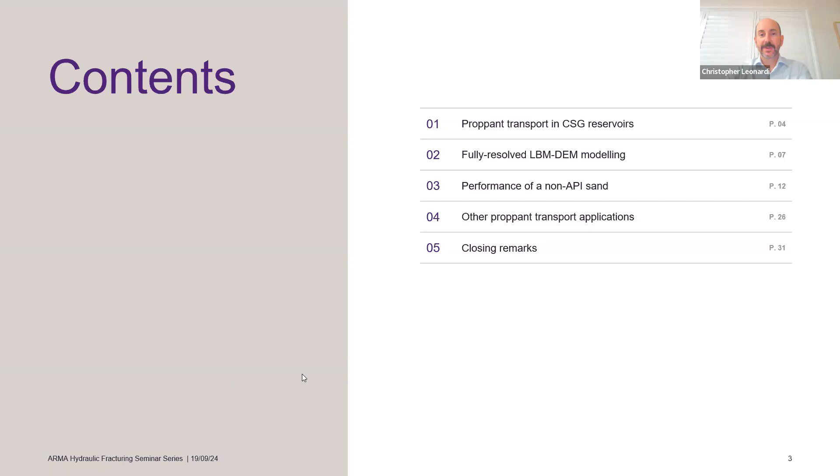Coal bed methane is a little different to shale. We're dealing with reservoirs which are naturally fractured and in the large proportion don't need any hydraulic fracturing for economic production. So the natural fracture network results in sufficient permeability to produce economic rates of production. But where the natural fracture network is not sufficient, wells will be fractured to try and get economic rates of gas out of the subsurface.

So we all know what hydraulic fracturing is. I don't have to go through the details on the left. I will say that various techniques have been used to try and improve hydraulic fracturing outcomes in coal seam gas reservoirs here in Queensland, including the use of 100 mesh following pad and prior to a more traditional sand to try and enter some of the cleat network, which is connected to the primary fractures, and also much more recently, the deployment of microproppants to try and also activate that cleat network, which is shown schematically over here on the right.

So we've got a diagram of some typical face and butt cleats that you would have in a coal seam, and down in the bottom right-hand side, this sort of schematic idea that one would inject particles into the primary fracture that hopefully leak off into the cleat network to help stimulate them after the fluid pressure is reduced.

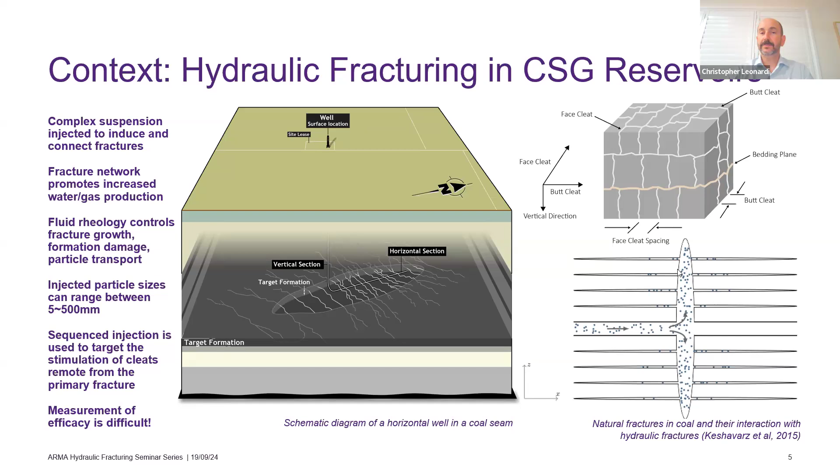And so what do we do to try and understand proppant behavior? As has been mentioned, we do high-fidelity simulations of particle transport in very small geometries. So that's where the thimbleful of proppant comes from.

And we do this in such a way that we try to capture all of the relevant physics in the particular problem. So Navier-Stokes hydrodynamics, full frictional contact of particles, and the boundaries or the fracture in which they flow, fluid rheology, any electrostatic forces that might be present as well, and do simulations that look like this animation here.

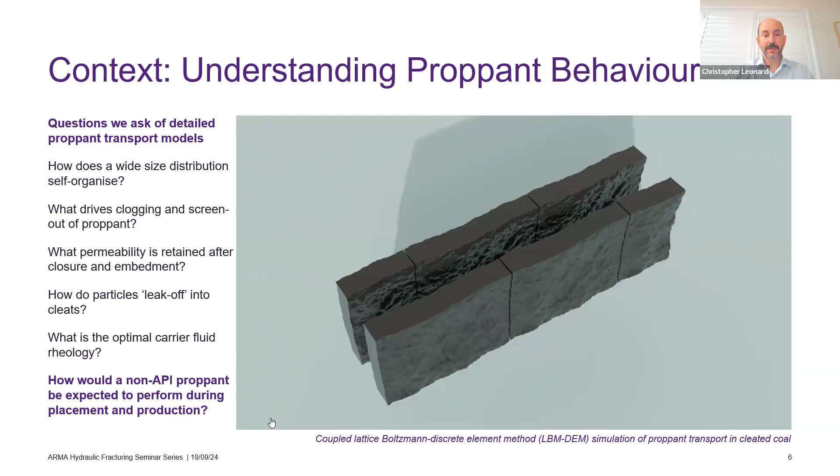Hopefully it'll, whoops, it's not played for some reason.

I'll try that again. So yeah, this is just a rendering of one of our simulations. We've got a primary fracture with some branching cleats, and then we start injecting our proppant suspension. We see leak off, and we see occlusions forming at those leak off points because of the drag of that fluid in part on the particles near those cleats.

And we can use this type of model to study a whole bunch of things, including size segregation, migration, particle leak off, and ultimately the retained pack and pack permeability in our fracture. So particular questions that we've asked of this type of modeling include, if you have a wide size distribution of particles, how do those particles self-organize? How do they migrate? How do they segregate?

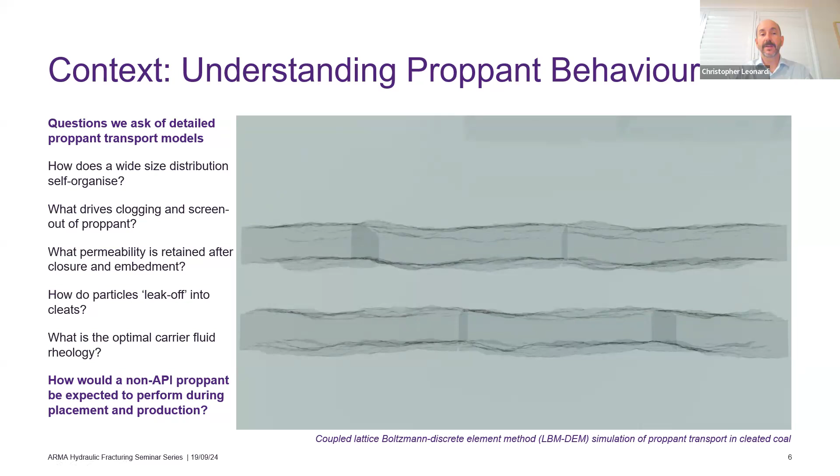What drives clogging and screen out of proppant under various solids loadings and fracture textures? What's the retained permeability after closure or conductivity and embedment? How do particles leak off into cleats? What's the optimal carrier fluid rheology? And the focus of this talk will be how would a non-API proppant be expected to perform during placement and then production?

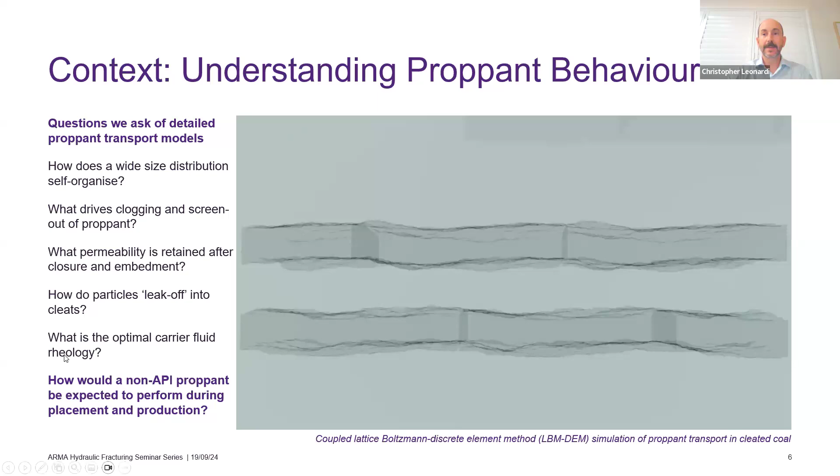So I'll talk very quickly about the modeling technique that we use here, where we're using the lattice Boltzmann method to simulate the fluid mechanics and the discrete element method to simulate the particle mechanics. For those of you that don't know, LBM's a fairly mature alternative to conventional methods for modeling fluids now, where the traditional methods discretize the Navier-Stokes equations.

What we do in the lattice Boltzmann method is we discretize an averaged form of the Boltzmann equation for statistical mechanics. And instead of solving PDEs like Navier-Stokes momentum and mass conservation equations, we solve for the propagation of particles of mass that move around on a grid and collide with one another. And at the macroscopic scale, that mesoscopic model actually emerges to give us a Navier-Stokes type hydrodynamic model, which is very useful because we can implement it on a regular orthogonal grid.

It's very straightforward to map complex boundaries on the lattice Boltzmann method grid. And therefore, we can incorporate a large number of irregularly shaped particles. We can couple those in. And we have some serious advantages in terms of locality of computation, which means parallelization is relatively straightforward. And we can really make good use of not just single GPUs, but multi-GPU clusters, which are beginning to dominate the high-performance landscape in the big compute machines worldwide.

So LBM is actually used quite widely in industry now, a lot for vehicle aerodynamics. The major CFD packages have got their own lattice Boltzmann solver implemented in them now. And so it's no longer a niche technique, it's actually quite widespread.

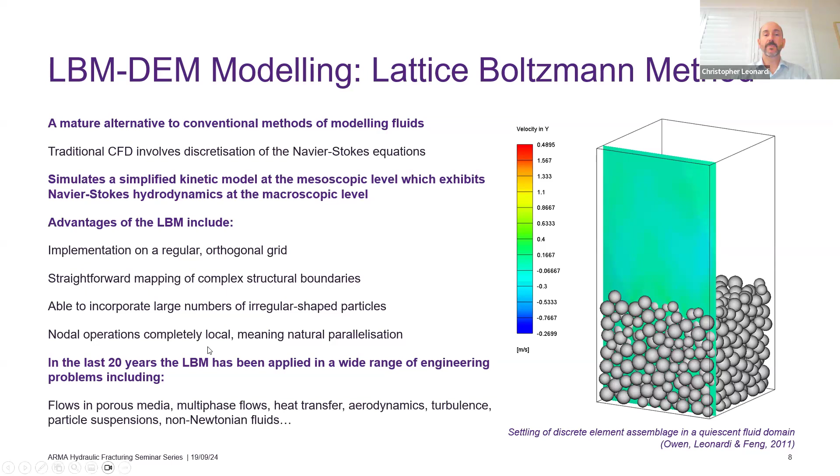And so it's used widely in bulk materials handling problems, but also in geomechanics, where we're dealing with the fracture and fragmentation of rock type materials. So one of the good advantages of DEM is it's very straightforward to couple it to the LBM, as I've already mentioned, and simulate particle suspensions at high fidelity. So what I mean by that is we're fully resolving the pressure field around a particle so that we capture the drag and lift quite well.

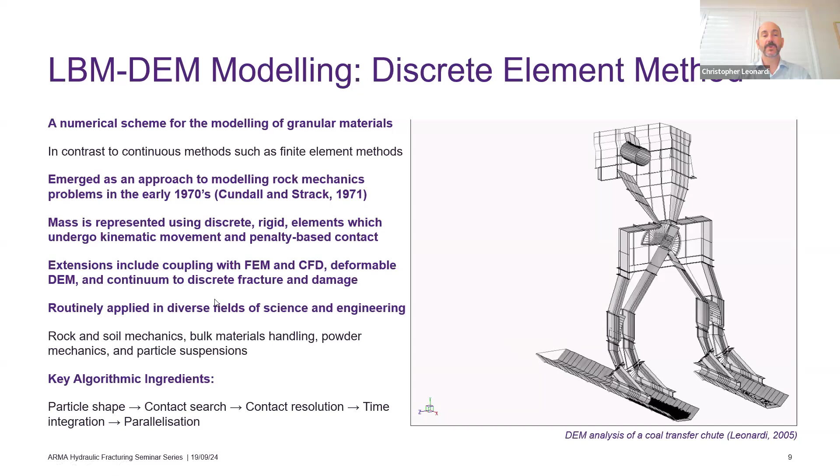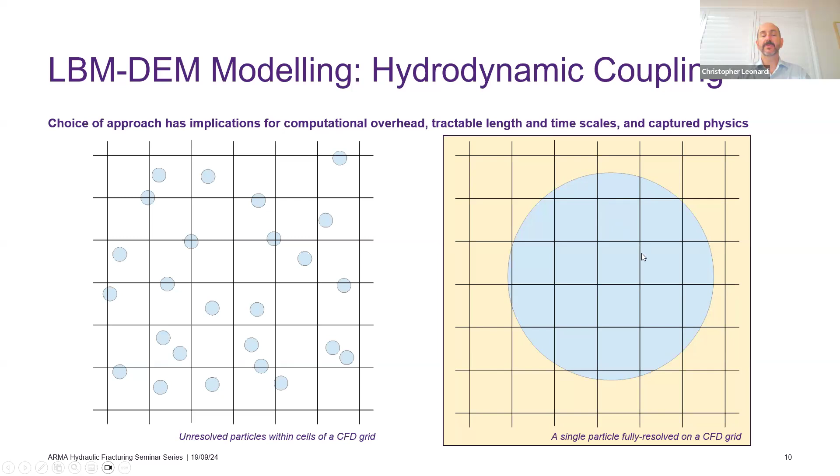Here, it is the opposite. And so what that implies is that these computations, even though they are physically quite small, are quite expensive. And so we're using significant amounts of compute time to be able to generate the results that we are generating.

If you're interested in how this works in a little bit more detail, the code that we publish is open source, so TCLB, and if you just search tclb.io, you'll find our website, where there's a whole bunch of papers that describe the mathematics and also allow you to download the software and play with it for yourself.

Right. So with that said, I'll get on to the case study that I wanted to talk about, and the problem was brought to us by an industry partner who were looking at using a locally sourced sand that was cheaper than the product that was coming from interstate, but less favorable in terms of its shape and its size distribution. And so I just refer to it here as a non-API sand because it does not meet some of the API standards, particularly on particle shape.

But there's a photo in the bottom left that shows you what it looks like. So it's quite angular. There's quite a wide size distribution. And you can see the size distribution also up here on the top left. And so just for comparison in terms of roundness and sphericity, you see that in comparison to a Wisconsin sand, which has got a really quite nice spherical shape, the roundness is significantly lower and the sphericity is lower as well.

So our partner was interested in how is this stuff going to flow in a fracture? Is it going to enter the branching cleats to help stimulate those? And once it is packed in the fracture, what's it going to mean in terms of fracture conductivity?

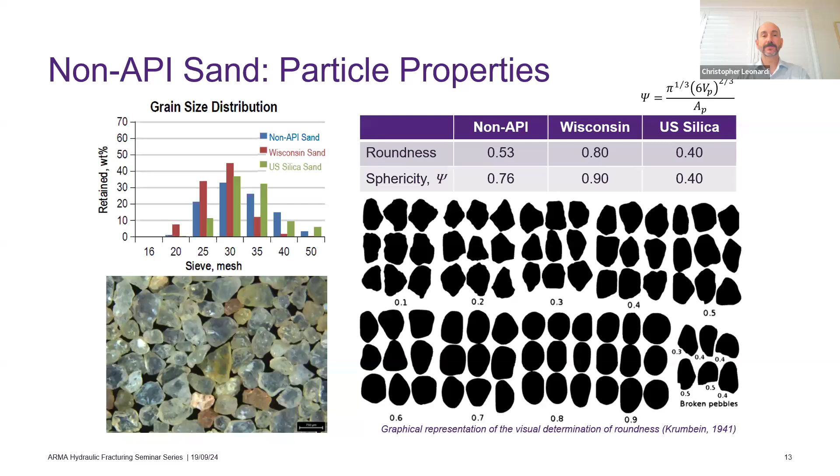So the way we go about analyzing this problem, as I've mentioned, is we study this at a very small scale, but we start with a fracture geometry that we generate from a power spectrum model, which was originally sourced from the literature. And we've modified it to take advantage of some imaging we've done on some rock surfaces here. And so with this power spectrum, we're able to generate lots and lots of different realizations of fractures based on 3 parameters. So it's the power spectrum, it's the surface correlation, and the distribution of roughness.

And so we basically can control the long wavelength tortuosity of the fracture, and then the short wavelength roughness of the fracture surfaces, and then how well they're correlated. And so if they're perfectly correlated, that means the 2 surfaces of the fracture are parallel at all times, but when they become decorrelated, they are no longer necessarily parallel.

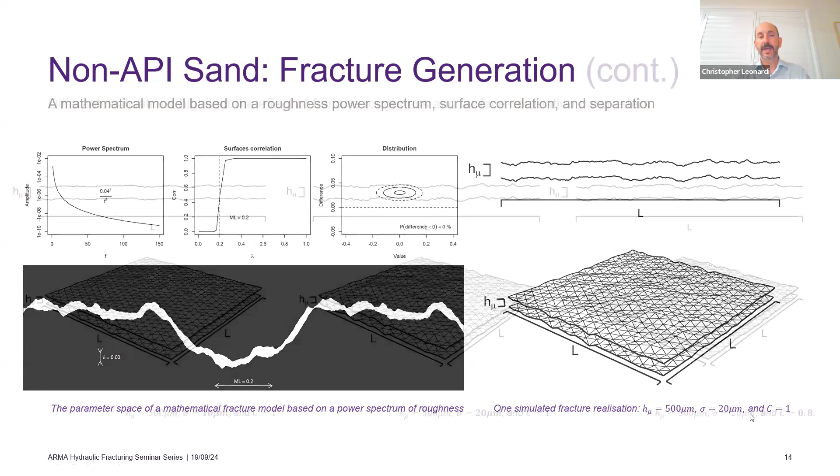And so what we can see here on the right-hand side is one realization of a fracture that has a mean width of 0.5 millimeter and a mean roughness of 20 micron. It's perfectly correlated, so our correlation coefficient here is 1, and a number of other realizations as well.

So this is a 0.5 millimeter fracture with a roughness of 10 micron. This is the same fracture with a roughness of 20 micron, and then a roughness of 20 micron with some decorrelation. And so as we continue to decorrelate these fractures, they actually will touch in certain places. And so we end up with something that could be a fracture that has been dislocated due to shear, or changed due to some mineralization that's built up inside the fracture.

What's really nice about this approach is that we can run, say, multiple repeats of the same analysis and generate statistics on our results. So rather than just generating a geometry, running it in our analysis, and then listing one particular result, what we can do is run 10 or 20 different realizations of the same statistical description of a fracture, and then get a distribution of what the results look like.

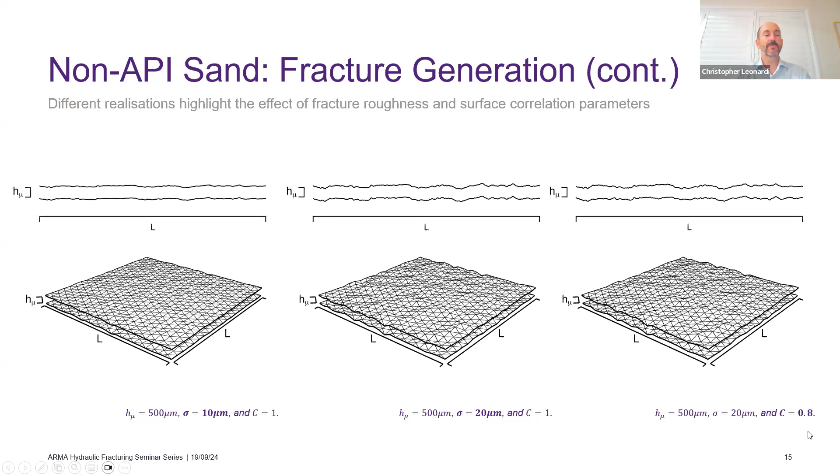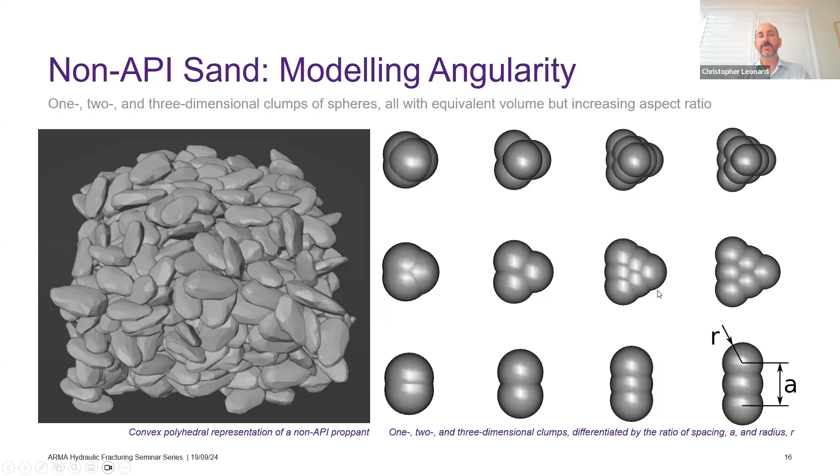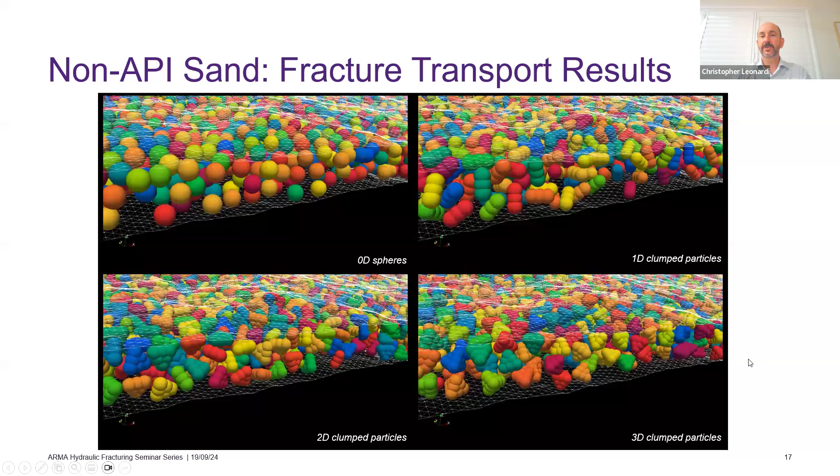So whilst this might be nice to look at, it doesn't really tell us much. It's certainly not quantitative in terms of what the behavior is that we're seeing there. And so what we do to interpret our results is look at them in the context of other empirical models that exist in the literature for suspension transport and also screen out.

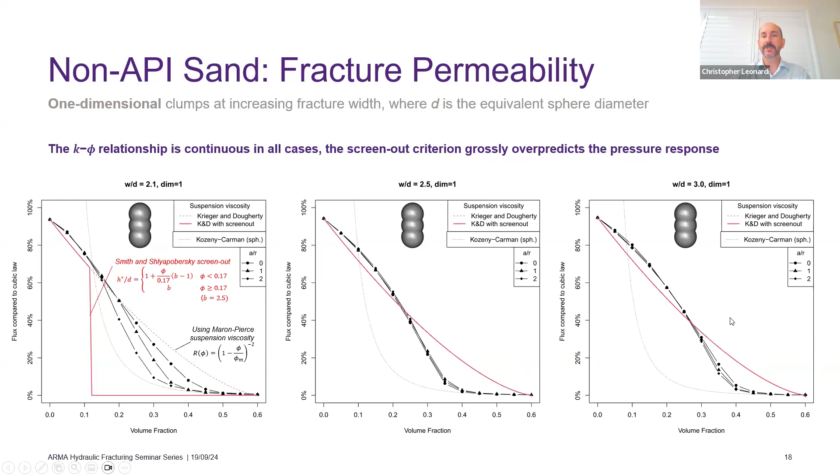The results are all effectively exactly the same, but in no case does the behavior match what you would predict with this Krieger-Dougherty model with the Maron-Pierce suspension viscosity. So then if we go to our 2D clumps, we see similar types of trends. We see the fact that as the fracture gets wider, the influence of particle angularity effectively disappears. That's true for this width on diameter of 2.5 and of 3.

but the way we see this manifesting is that there is a degree, particularly for these planar shapes, where they align themselves with the flow streamlines and actually flow better than spheres or particles that get longer again. So there is, for a certain shape, particles that align themselves quite nicely with the flow and therefore have higher fracture permeability. But as we get longer again, we expect that permeability would drop off again, and we'd start to see a drop in performance.

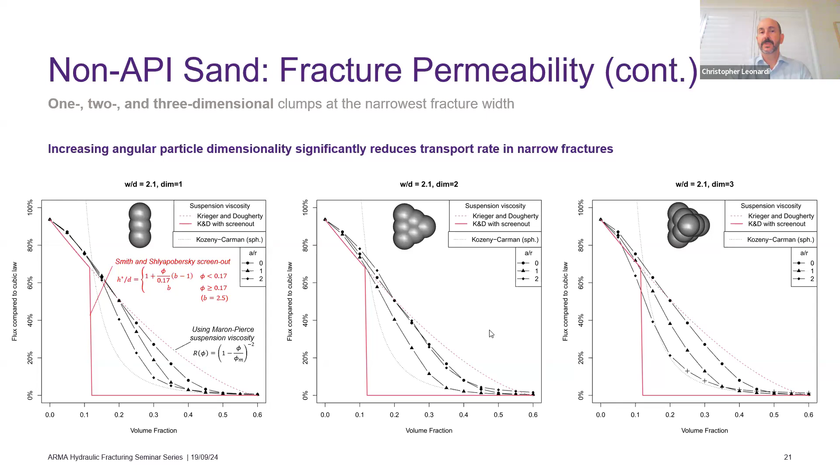And so in summary, really where the particle angularity is most important is in narrow fractures. So this is at fracture extremities, or as is the case for coal seam gas production or stimulation, in the cleats that we're hoping to have some of these particles enter. So where W on D is 2 or even less, we would expect really quite poor entrance characteristics of these particles, just due to the way that they transport in narrow fractures, and particularly as their local solid volume fraction increases, their impediments to flow would also increase as well. So that's the transport part.

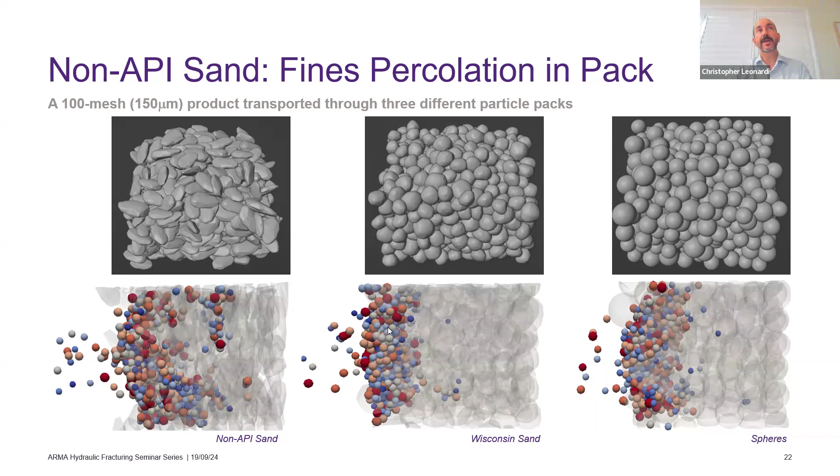And what we've done in this part of the work is flowed 100 mesh through these packs to determine their percolation characteristics and their retained conductivity. So we create a pack out of these different proppant types, including our non-API sand, and we flow some 100 mesh through it to see how things permit particle entry and then strain particles midway through the pack.

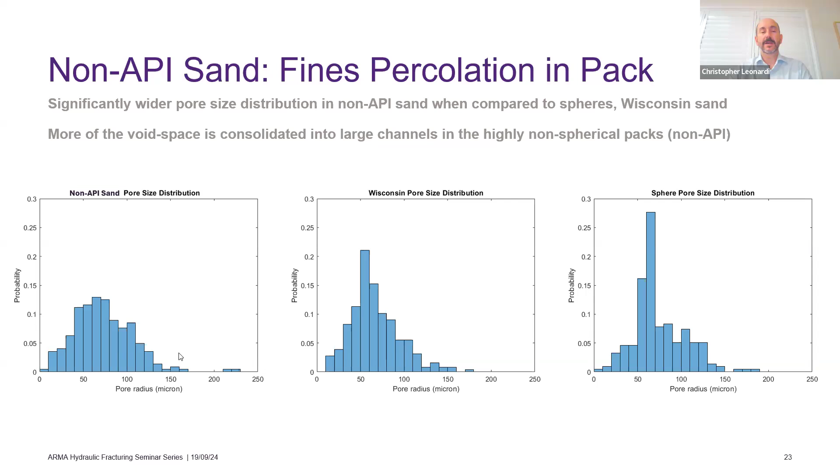But if we look at our non-API sand over here on the left, we've got a much broader distribution of pore sizes, meaning that we have some quite large ones and some quite small ones, and a relatively broad distribution between those extremities. And that has implications for allowing particles to enter, but then also excluding them at some point throughout the pack.

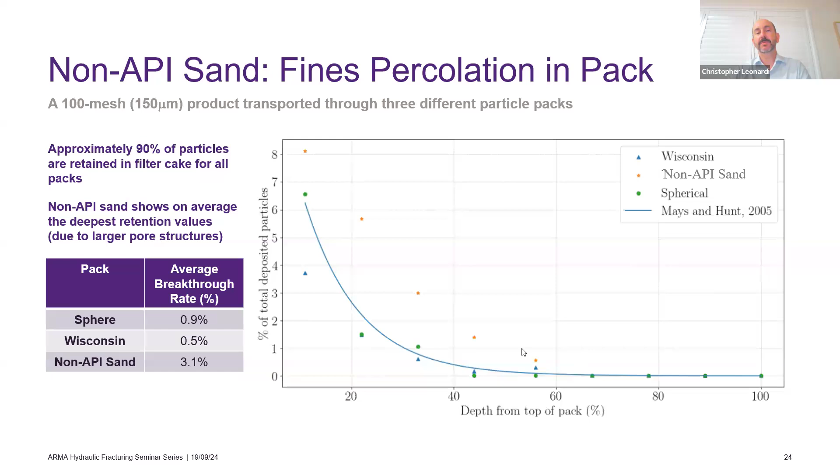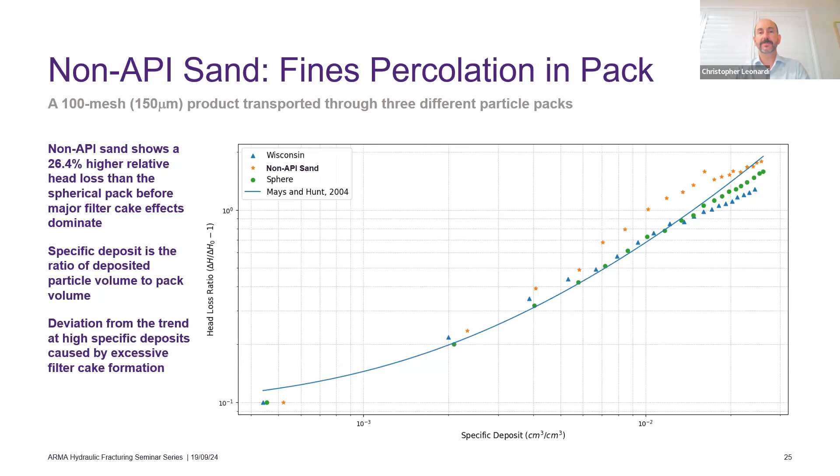we can see that because this type of particle pack permits much more particles to enter, but then excludes them or filters them out at some point, it will, over the longer term, potentially show greater decline in conductivity as the years go on and the wells and the fracture continues to produce. And so that's a particularly interesting result for our partners and their decision in terms of what they use as their primary proppant in their hydraulic fractures. So that's the end of that case study.

Before I finish, I just wanted to touch briefly on some other applications. If you saw my presentation at ARMA, you will have seen these slides before, so I'll only spend a few minutes talking about these, but they're interesting nonetheless for what we can learn from simulations of a very small section of proppant transport in a fracture.

So the first one was motivated by the transport of microproppant in hydraulic fractures and ended up showing some quite interesting results in terms of particle migration and size segregation. So one of the challenges with a microproppant is quite poor size control. So particles can range in a commercial product anywhere from on the order of 2 to 3 microns up to 60 or 70 microns.

And so you've got, by virtue of the product, a fairly wide size distribution that you're pumping into your fractures. And what we did from an analysis point of view was actually just flowed that material in a channel that's periodic in the flow-wise and transverse directions to see how these materials organize themselves over time. And one of the really interesting things that we found was the smallest particles in that suspension would end up migrating to the center of the channel if the solid volume fraction was sufficiently high to limit the shear fluctuations of the larger particles.

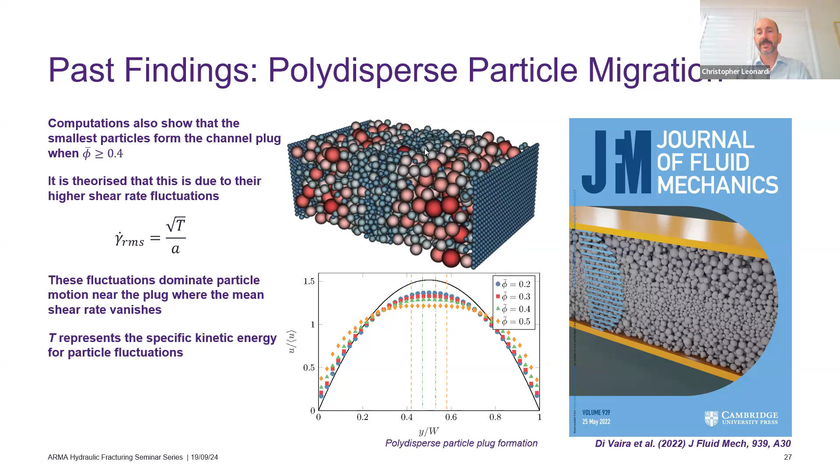One of the other things that we've done was looked at clogging in narrow fractures from a probabilistic point of view, where we do small scale simulations in synthetic rough fractures and change the solid volume fraction to determine the probability of screen out occurring, or clogging occurring, I should say, at a particular solid volume fraction.

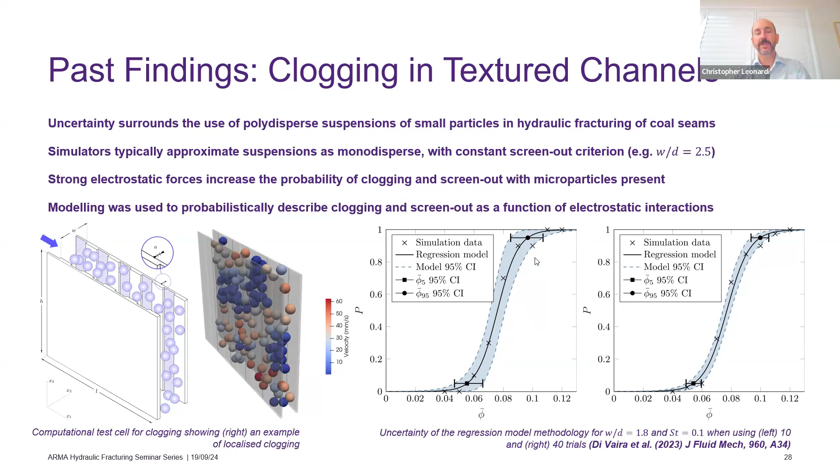What we also show is the influence of electrostatic forces, remembering that in this microparticle suspension, there are some particles that will be affected by DLVO forces, and we've implemented that in our solver and shown that as we increase those particle wall interactions, as you would expect, the solid volume fraction required for clogging to occur starts to decrease quite dramatically. So as we increase that electrostatic adhesive force, clogging starts to occur at lower and lower solid volume fractions.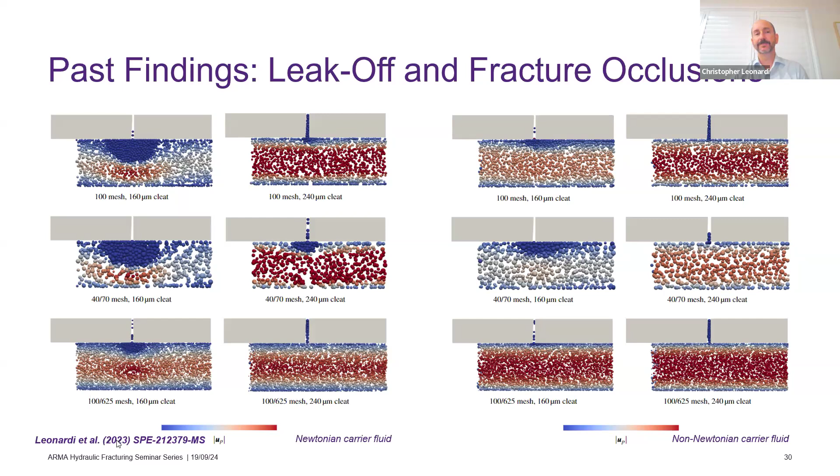So with that, I'll finish up, and I'll just say a couple of things about where we're going next. So in terms of our fracture generation, what we have started doing and we would like to do more of is informing our power spectrum with actual images of rock textures. So being coal, a sedimentary material, the fractures that form vertically, so those desiccation cleats, have quite a different texture to those that are horizontal in the plane of bedding. And this changes with the maturity of the coal as well.

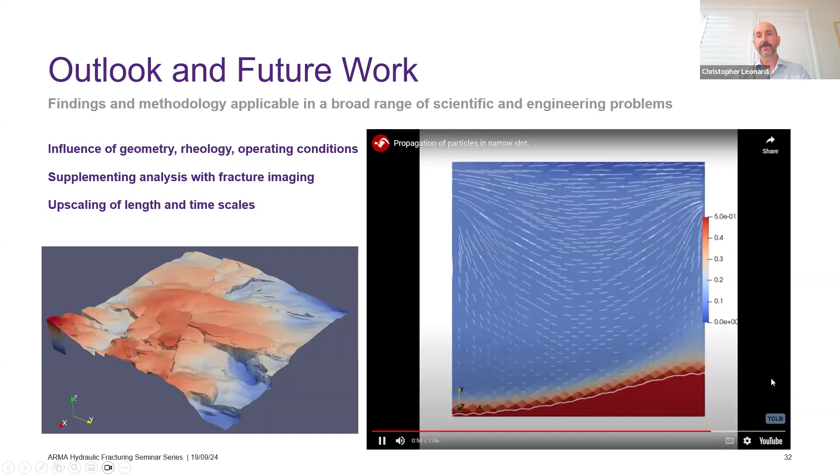So what we've got here is a suspension being injected in the left of this square slot, and flow exiting at the top right. And what you see here in red is the accumulation of particles forming a bed in this fracture. But this is very preliminary work, and early next year we hope to be able to present more formally on this work.

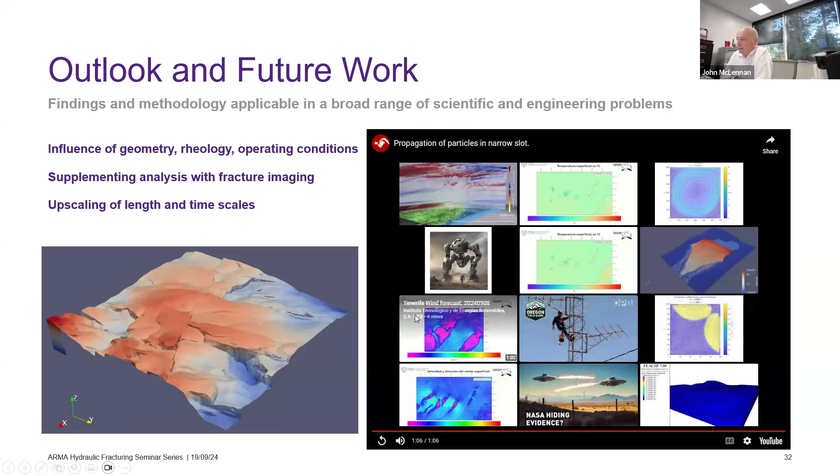First one, is this model used to match the pressure trend in commercial fracture stages with SLB rod-shaped proppant or Hall interlock proppant? No, I haven't done that. I haven't tested any Schlumberger rods or Hall interlock proppant, but it's something that we could do. And I'd have to look up where I might find that data. But it sounds like an interesting problem and a really good further validation case for what it is that we're doing.

Well, we don't want to let you off the hook so easily. Can you speculate what you think might happen with a rod-shaped proppant configuration? So a rod-shaped proppant is going to behave very similarly to the linear clumps that we've been modeling. It would just be at a greater aspect ratio. What's going to happen? There will be this behavior where at a certain aspect ratio, the particles align themselves with the streamlines and they actually transport quite nicely if the solid volume fraction is not too high.

But it doesn't take much to perturb that behavior. So it can be perturbed by fracture roughness or fracture tortuosity, or it can be perturbed by the particle length becoming quite significant with respect to the scale of the roughness. So there would be a point, I would imagine, when the solid volume fraction gets high enough that these things start to get impeded quite significantly in terms of their transport. Yeah.